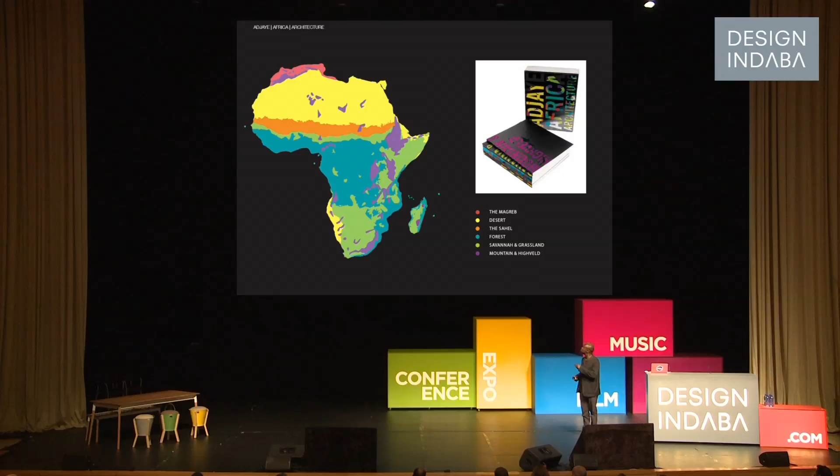Even though you may be francophone or anglophone, there are incredible connections coming through geography and place which are binding you, and you might not know it. That's been extraordinary during this 11-year journey, to see those connections.

And that's a profound thing that's kind of affecting the way we're working all the time now. So this book just came out last year, and we're really proud of it. And now we're doing other studies right now, looking at different parts of the world and trying to understand the way in which the built environment has been made and how it affects people.

Second section is really to talk about the evolving topologies in the world. Disaster and places of delicate ecosystems is something that's becoming more present in our world, and I think architects have to be absolutely engaged in it.

Asempa is a Ghanaian word which means a good story. It's really about how to make a response to a disaster, which I think was probably the first big urban disaster we've seen in our century, which woke us all up to how fragile our cities are.

And that is New Orleans and Katrina. I think Katrina was that media event which really blew up in our minds that, wow, we are in a fragile ecology. And I think architecture has to respond to that.

There's a fantastic charity called Make It Right, which asks ten architects to come in and work on creating new topologies for these communities. Where the flood happened was, of course, the poorest part of the city, because New Orleans is built below sea level, but the highest point is obviously the downtown, which was not affected. The lowest part, the residential areas, are where the floods occurred.

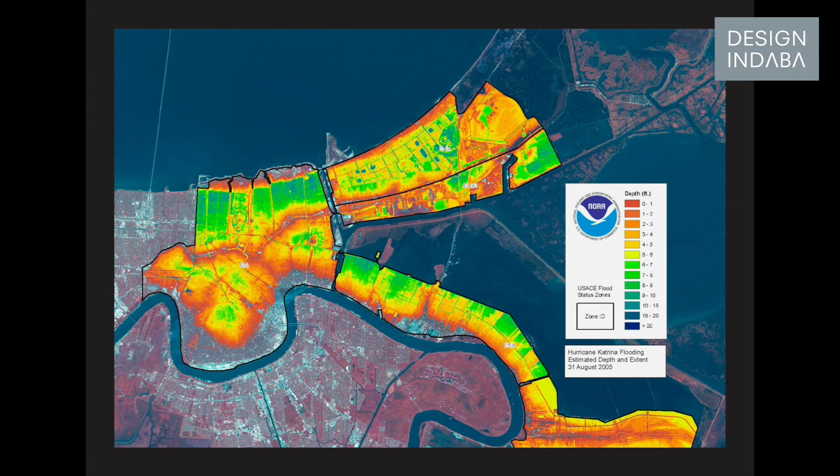New Orleans is famous for its Mardi Gras and incredible festivals. It's an incredible multicultural melting pot. But the breach happened in the most devastating part—the most delicate part between the sea and the Mississippi coming in. And you can imagine these incredible ecosystems suddenly becoming places of extraordinary trauma.

So in a very quick second, our cities and our organizations can be completely destroyed and devastated. And I think if we allow mechanization to just build the environments we're in, and we feel that as architects and designers we abdicate that responsibility, we create potentials like this. This shows why architecture, or design rather, is required ever more—with mechanizations—to make more responsive scenarios to climate.

These are the shotgun houses of New Orleans. These are some of the more responsive houses, commercial architectures that were there. This was something we looked at. We were asked to come in and really rebuild.

Make a model of sort of cheap housing—the cheapest house a house builder could make was the budget we had to use. But we had to flip that, to make it respond and do more than just be the sum of an enclosure for a family. So we questioned everything: foundations, roof, the way you made panelization. We analyzed the typical house, which was a slave house, and said, why not invert and change everything about this to something new.

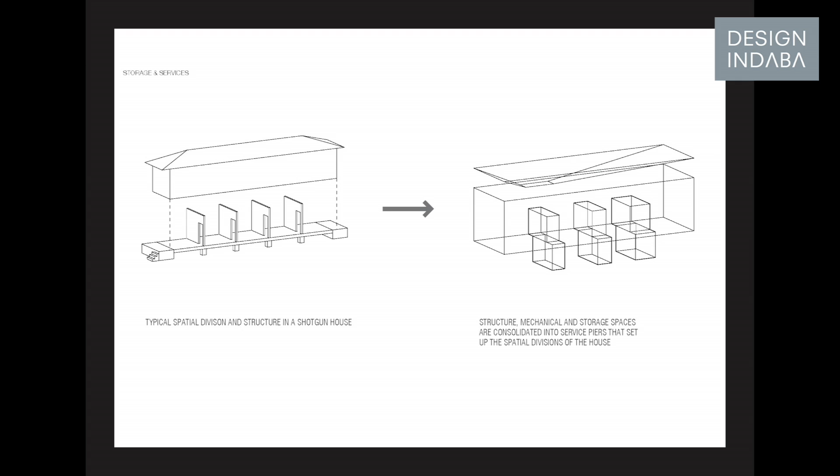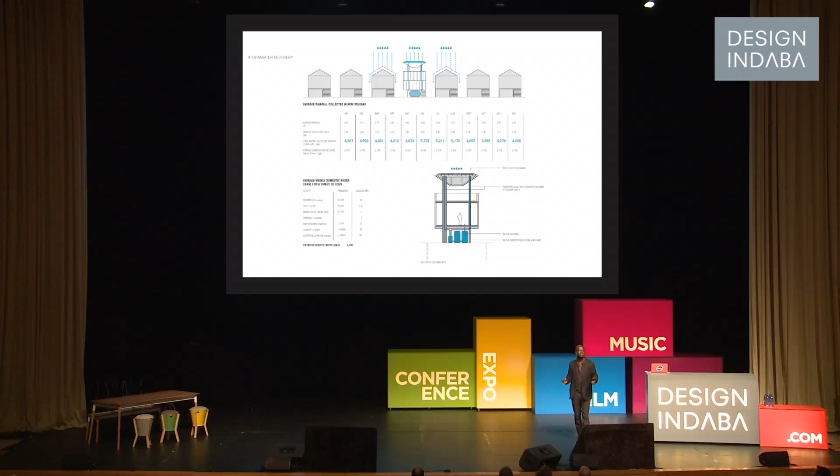We said, if this is what housing does—if roofs traditionally collect water, our traditional perception is you need a roof to collect a drain to then go into the stormwater runoff. But actually stormwater runoffs fail because we have too much urbanization, and so they kind of blow back. So actually what we need to do is collect water so we can use it as grey water.

So we said all the roofs have to be inverted—collect them, flip them up, and use them as cups that collect the rain, and use it to also collect energy from the sun. But also in doing that, you create a new topology. You move the topology from a pyramid to an inverted pyramid—a collector of energy rather than one trying to protect itself from the world. So this became a motif that we thought was powerful and could become something new.

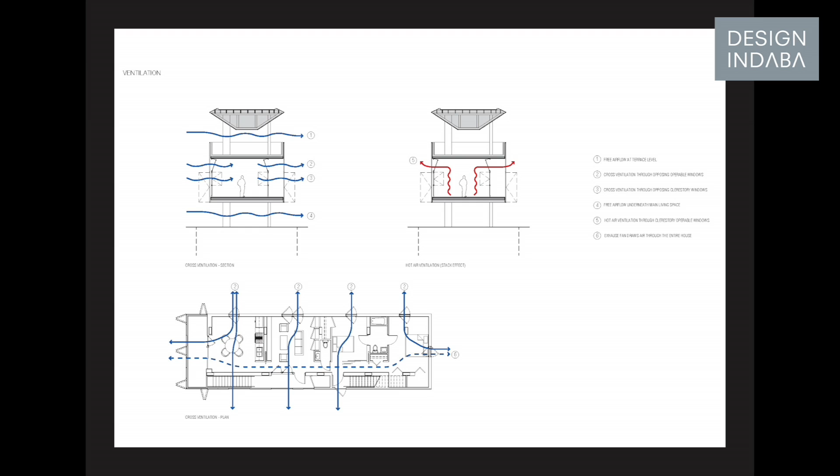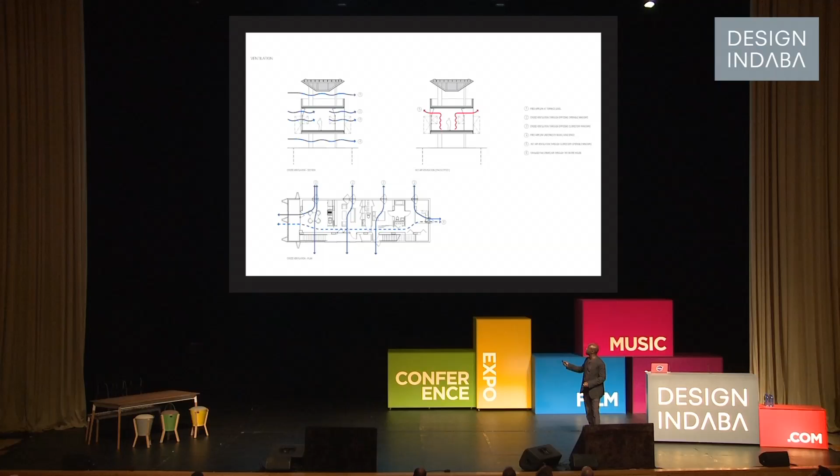We talked about all the floodplain issues, making houses that would allow themselves to be above the 500-year flood as a basic minimum. And also to say that in New Orleans, which at the ground plane is extremely hot, but at the upper level—where you see the balconies of the rich houses—it's extremely cool because suddenly you get the currents. Why can't everybody have that sort of luxury? So move away from an architecture of being on the ground and hot, and move to an architecture of being in the air.

This is the rebuilding of our sites. The 10 architects are all in here. It's a bit dark, but this is one of my houses. There are about 20 of these houses built. It's a system which was given to the community for free, and we offered our services for free for this project. Basically, there are patterns, almost like house building patterns. If your house was destroyed in the 9th ward, you can go to the ward, choose a pattern, and work through their mortgage system to then get your house remade into one of these designs.

This has been going for quite a few years, and we've been developing the evolution of it, and it's just amazing to see how people have been using these spaces.

This space not only works, we talked to FEMA, and what they started to say was really powerful for them was that one of the biggest problems about a flood is actually not so much escaping the water, but having somewhere to stay for maybe one, two, three weeks whilst the rescue team comes to find you, if you're in the middle of nowhere. So the idea of having a space that could be absolutely inhabited and safe is paramount, not just a place that you could help, but the family could go up there and wait, and the structure was robust enough.

This is just the latest one that was recently built that we're really proud of. This sort of evolution of the color, the form, the construction techniques are happening. This is the traditional house here, and this is the new type. We had images recently of a wedding that was celebrated in here, and we were really, really excited by that. This is that building that's just been completed.

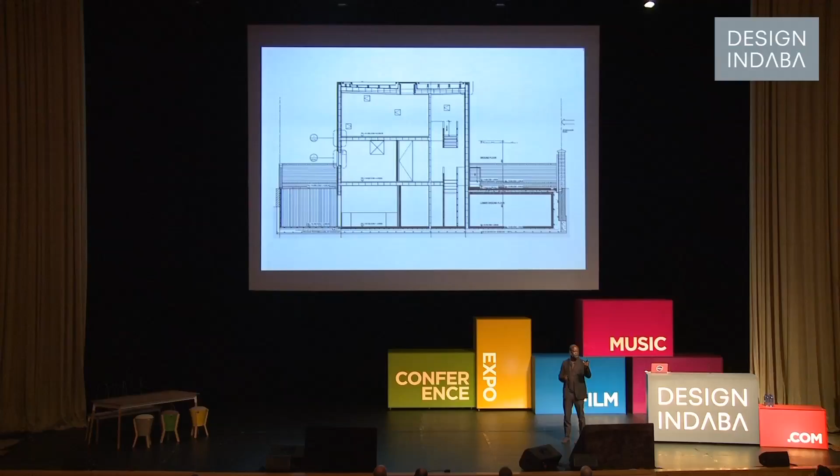I show you this because it's really critical that it was basically about making an excavation, this is the street level, putting in a concrete slab and dropping this from a factory in 4 days onto the site. Then the cladding and dressing took the rest of the time to do. But the construction technique, as you see in this graphic, is really all the same. It's this timber, solid compressed section, engineered into different sizes. The acoustics, the kind of construction, and the whole way in which you make it takes away from that hollowness of dry lining. It was the idea of trying to make something which had the integrity of its form built into the nature of the way in which it's fabricated.

But also, for me, it has to then become something that's emotional, becomes a place that can be human, and express the kind of humanity that we want in the manufacturing.

This is the house, so you can imagine when it first came up, there was a lot of controversy in the neighborhood. There were some very upset people who thought we devalued their neighborhood. And now this house has got a lot of attention and is the pride of the community. But it was a very unusual creature that arrived.

It has a kind of roof terrace. There's a bed, basically, an open bed for the summer, which is this little secret for the couple to escape from their kids and from everybody else if they want, and hide in the roof.

It's super simple. There's one window in the facade, and it frames a very important sort of church, which is this beautiful Gothic piece. And it's all about the staircase, which is made out of veneered plywood, walnut veneered plywood, which runs in a vertical triple-height space through the chamber.

And then you realize that the living room is basically in the trees. So we made one piece of glass that frames the trees, and so your aspect—because the site is incredibly narrow, all the other houses have gardens, you don't, it's just in a plot—but it takes advantage of that London rear view.

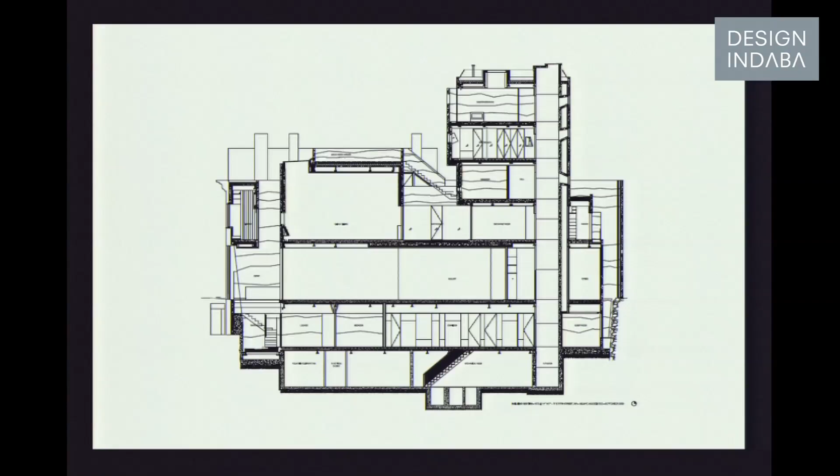This project, where you have suddenly a client who wants a house—essentially the house is developed for art, it has an extensive art collection in it. But what we tried to do is say, how can we make a house in an urban context like New York with its incredible history and layering?

So we said, why don't we take the clues of the planning and zoning of New York as a way to drive the relationship and the kind of form? So this is the existing facade of the building. We clipped a little form, a really extreme form next to it. We made a light well.

And then we made another form, the second tower, which contains the living room and the main principal space that you come in—it's basically a gallery, you walk straight into a gallery for hanging art. And then we made a third form, this vertical shaft, which steps up as you go up.

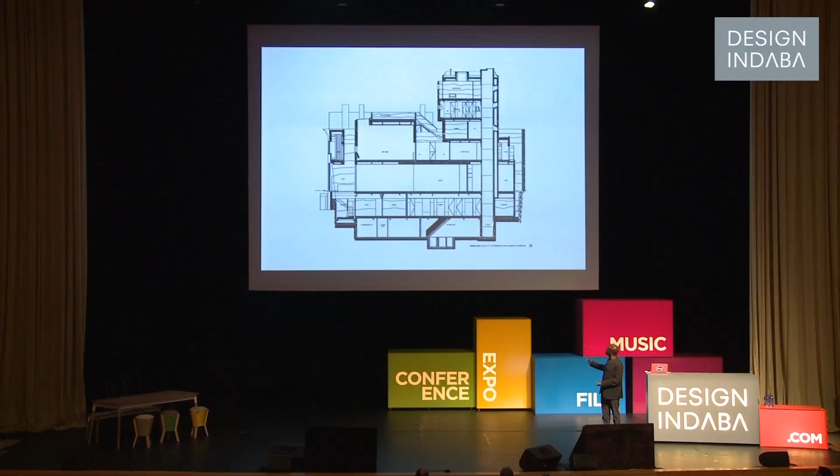And then a fourth chamber here, which reveals all the foundations, because we dug down three stories below, and we went up five stories. So it's a kind of vertical shaft that cuts through New York and allows you to see the way in which the city is made.

And you realize that actually the terra firma of New York is not really the terra firma. It's actually a couple of layers below, and people think they're walking on the ground, but actually they're not—it's an artifice. The ground plane is actually somewhere two, three stories below. And when you cut through that, you see what New York was made up of.

It was schist stone, this extraordinary granite which made the city, timber compression forms, and the foundations are all still under the city. The city is a piece of archaeology, and the architecture in a way presents a way of looking at the city vertically and horizontally as a kind of new type in the city.

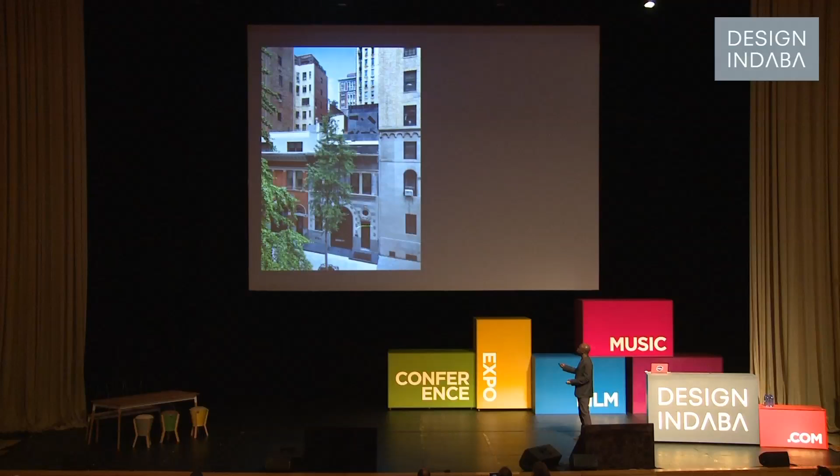So here it is. It's made out of black cast concrete. This is its initial form. It slips out and then presents a new sort of entrance. This is the gallery that you come into. You can drive a truck straight into the front. It's probably the only Park Avenue house that you can drive a truck straight into, only because the things you've got in there are very wealthy, and you want to make sure you're not schlepping them on the street.

So we developed a bridge with an incredible museum-scale door to get you in there. The residence comes straight up, and you see the first light well, which articulates the two towers. This is the third light well, where you suddenly see the original foundations of the city, and we framed it. The beams collapse around it to brace it, so you see it and you reveal it.

And the concrete, we spent an exorbitant amount of money teaching New York contractors to do bad concrete. I was like, let's make dry, handmade concrete. I want to see the life in it, and I wanted concrete to behave like geology. I wanted it to look like what it is. It's earth, it's material out of the ground, not a sort of artificial artifice.

So my interest in concrete is the way in which it performs, displaying weight, materiality, texture, imperfection, and the whole house is sump poured, so you have these extraordinary creases and lines. It looks like the skin of an elephant.

Living space. So you're looking through three layers: the outside, the thin chamber, the first light well, this second one, and the one that I showed you before is behind you. This is that thin chamber, which is a library, and sort of looks through. And this is looking the entire way through light well one, light well two, light well three, and the outside. And then this is that central one, which talks about the urbanism.

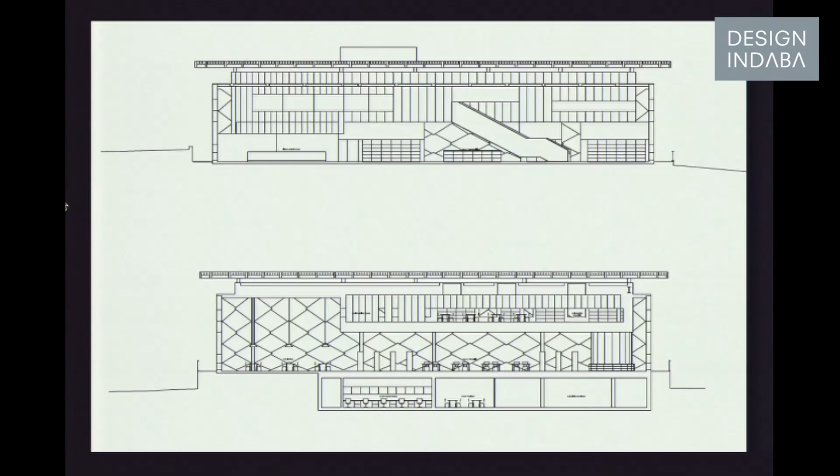The project acts as a pavilion, a gateway sort of between that housing and the park. In section it looks kind of straightforward, I guess. It's basically a series of buildings within buildings which keep changing scale and work through a series of things.

The outer skin is a box which is only 40% glazed, but looks like it's glass. It's not. Then there's a kind of inner box which has relationships to the sky and to the views, and a varying set of systems that take you up through it.

The skin is parametrically tuned so that it actually has a movement in it. It compresses and opens to do with perspective. It's really talking about the nature in which you can bespoke industrialization now - the ability to tune elements in the old rational standardizing sort of production of things to what you need.

The parametric tool can allow you to basically start to make incredible geometries, incredible shapes, but using the efficiency of computers to allow you to not make waste so that you don't bring up the cost. So these are standard units, but they're cut through an efficiency diagram, and if you notice, the geometry expands up and down and moves across the space.

This is the library. It's south-facing again, and it has this very large canopy, which projects over the entrance space and deals with the solar gain.

This is the skin of the building. You see that the diamonds become more vertical and compressed as you turn around the corner.

Forest and the suburbs. As you come close, you start to see the form, and you start to realize that these are actually just mirrors - every other one is a mirror. And when you get really close, you start to see that it's mirror, view, and these are highly insulated volumes, and that's how we get now 60% insulation in the skin.

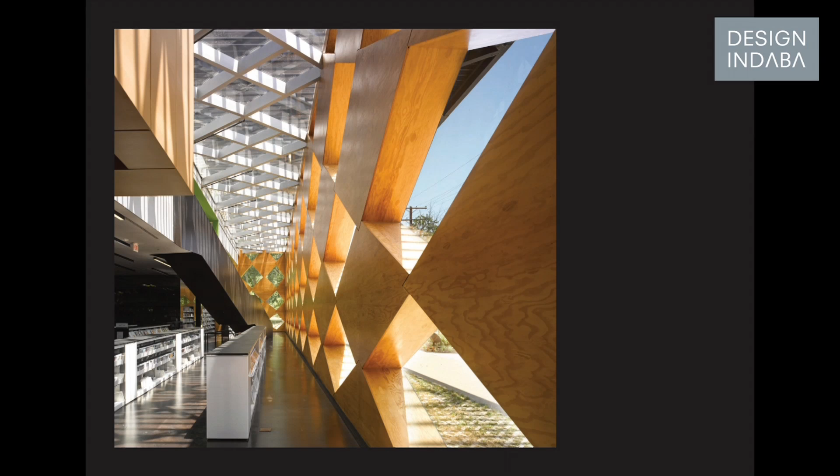And then when you go inside, you realize it's a wooden folly in the park. It's basically a giant lattice of plywood - essentially Douglas fir plywood, which has just been beautifully joined together, and it's basically holding the glazing, making spaces, making that depth, which is the contradiction of the exterior, and becomes the space for the enclosure.

This is looking back to the forest, through the computer rooms, teaching suites, special acoustic suites. And it's amazing, we see kids in here sitting with their computers, using these as kind of loungers, which is not designed, but really exciting.

We brought in Senegalese weavers to make the lampshades. That was kind of incredible because the US doesn't like importing things that are not tested from Africa. So that was a really tough one, you can imagine. But we managed to get these lampshades through, which I'm really proud of.

You can see those moment junctions. So this bending and really wanting to enjoy the bend and this idea of this wooded forest, almost playful-like, is articulated, and this is the way in which light and space and structure come together.

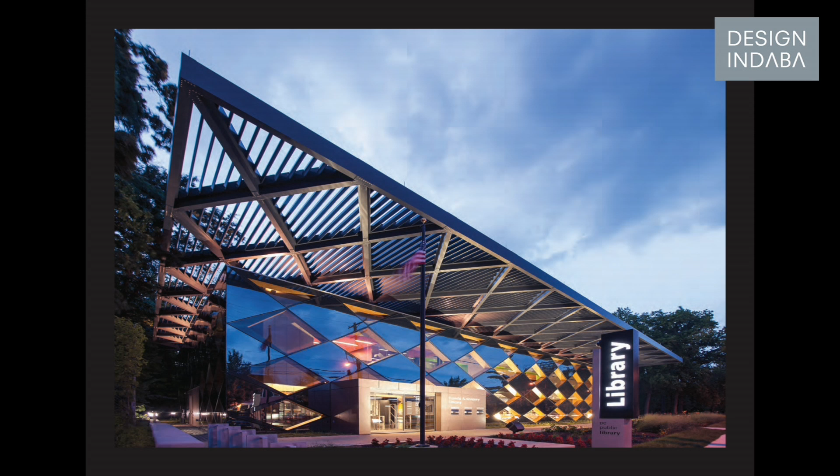Moscow is probably the biggest project we've done to date, a very challenging project, and a very different climate for me. I've sort of used to Europe and Africa before this, but moving north has been interesting. So what we were asked to do - it was an international competition, and we were very lucky to win it - is to build a management school.

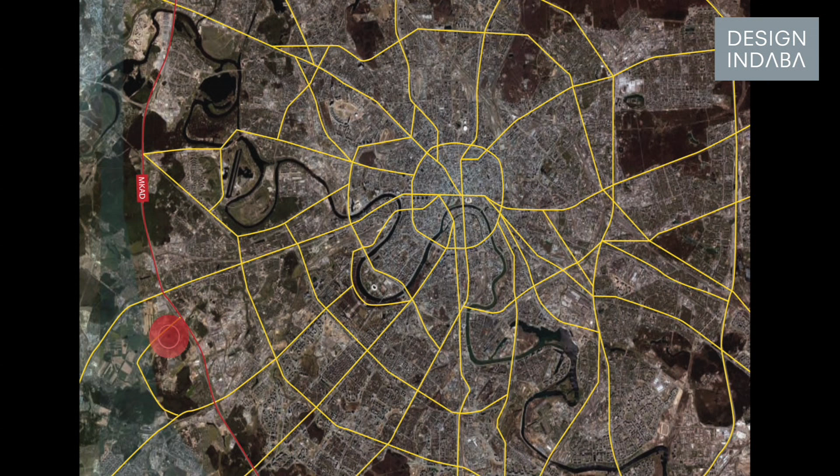It doesn't have a Harvard Business School or an INSEAD. When I won this competition, I was blown away by the heritage of Russia, but it's such a shame that very little of it is actually real.

It's the beginning of our idea of what industrialization does, to our sense of what modernism is. It comes from Russia, from the futurists, from the constructivists, etc. But very little of it's left, except for things like Melnikov's extraordinary house, which is basically a tiny little studio.

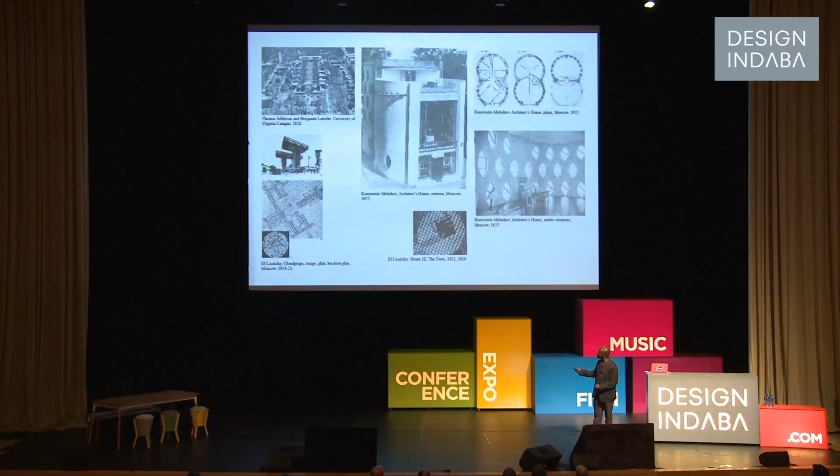But something that's really powerful is Tatlin and El Lissitzky's drawings. Look at this - this, for me, was the challenge. As a student in the 80s, I said I want to build this one day. I think this is the project that started to do that for me.

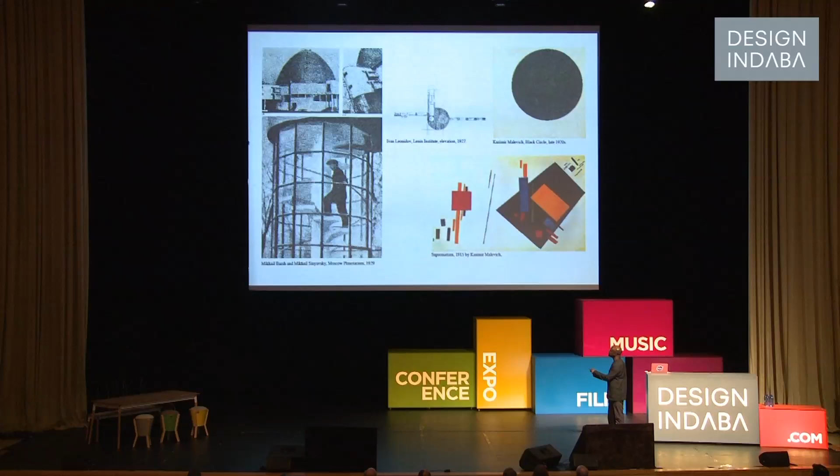The site was extraordinary. If Tatlin, for me, is the body of modernism with these forms, Malevich is the soul of emptiness, with his incredible studies of nothing and pure geometry, making composition that has some kind of meaning. I thought that between these two poles is a kind of idea of modernity, and what can we do with this.

It's ironic to me that these things exist on our continent, and some things that I love and look at - shrine structures in the Yoruba, weaving structures - and their incredible ability to make abstraction and form. I said there's actually connections between all these things, and I wanted to explore those.

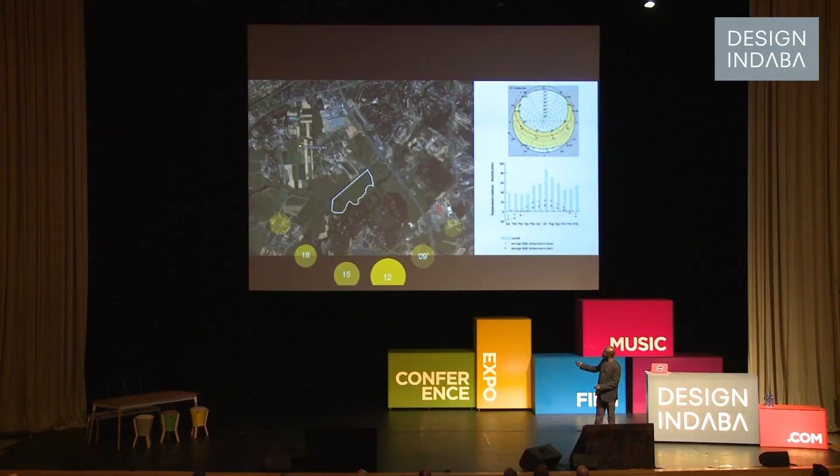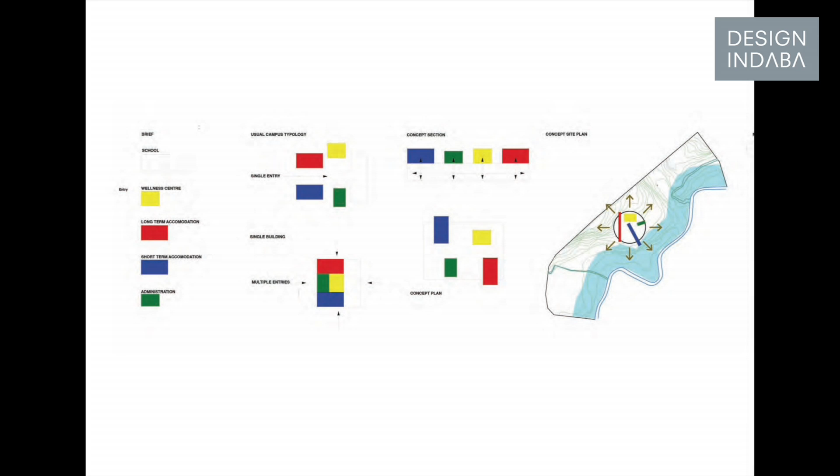So we said, you can't make a campus, you can't make a quad, you can't make all those monastery types, but you can make something that's similar to - it has to be a kind of new kind of building - which is similar actually to the churches that were made in Russia, the old churches, which are basically giant wooden boxes. But they had on top of them also this kind of idea of an architectural city, an ideal city. I also thought that was really powerful.

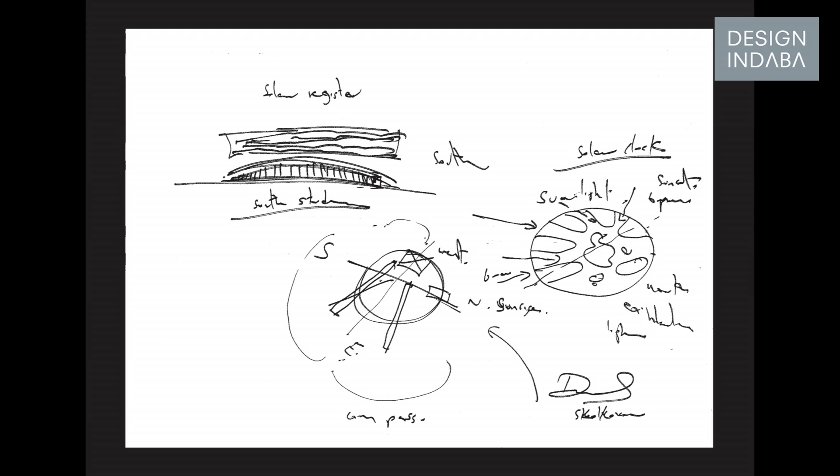I said, basically, let's make a hyper building, a giant, large-scale building, which is 300 feet deep, which organizes the entire school and is a kind of world. And above it, let's have a series of bars which have the education, a hotel - because the school is cross-subsidized by a conference center, which becomes the kind of premier conference center, which pays for a lot of the overheads - and a sort of body building, which is gym, swimming pool, etc.

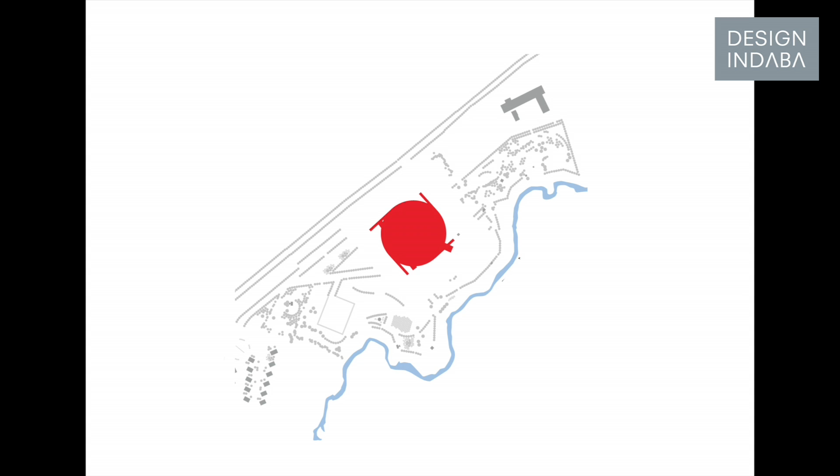But I said, let's make it, because it's the first building on the site, like a solar clock. So it's basically about the orientation and the location. This is the building in its landscape - you can see this massive form, a kind of new giant form in its landscape. It's a kind of reverse. So this is this form, which is the clock.

So each unit has to have a break. This is north, this is the southern aspect here. Basically the classrooms are between those, so that you always have school, view, daylight, school, view, daylight. But also the light breaks through, so you see the light through the day - it comes through in slices.

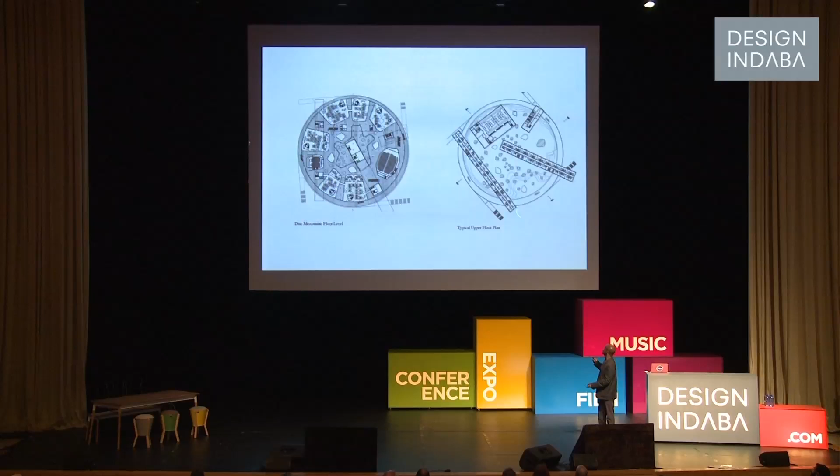It was kind of a new experience for us. You always go round and round, and you're always kind of observing the views. And this is kind of what a super scale building can sometimes allow, which is something completely new and unexplored in architecture. We have sort of urban architecture, which is large, but not single forms in the landscape of this kind of scale.

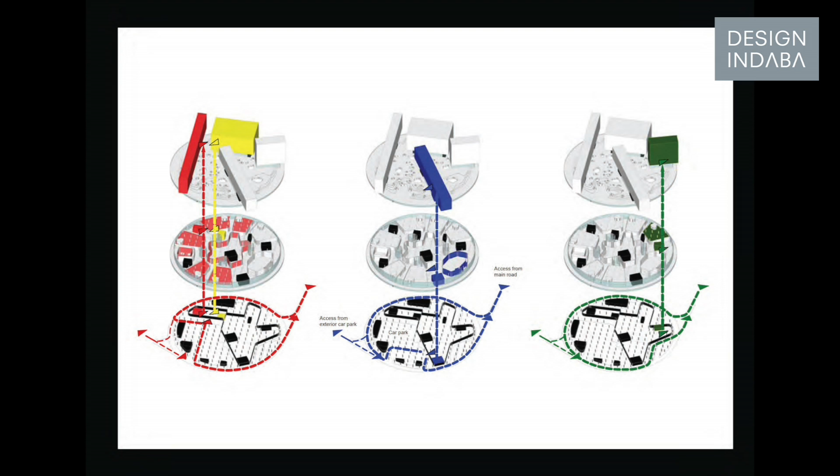This is just showing you the programmatic way in which the school, which is red, uses it; blue, which is the conference center; and the green, which is the back of house, administration, libraries, etc. This is the building in its context.

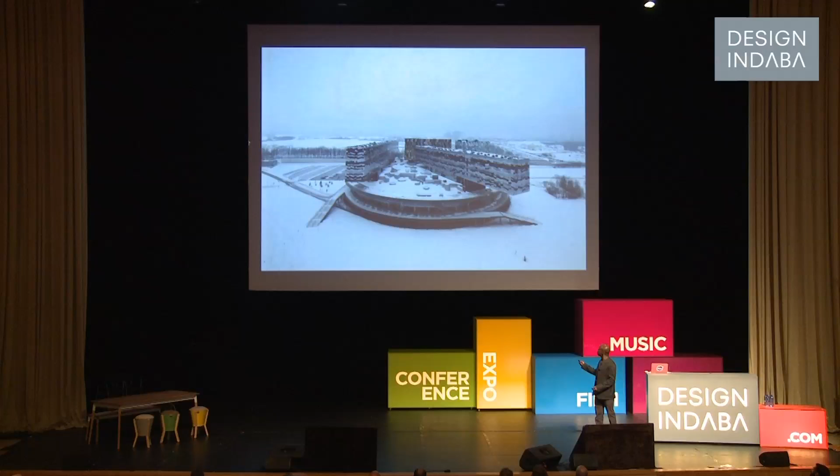It's a drawing of light as well, using parametric geometry—basically concrete and glass. All of this is cast, weight-bound concrete, with a 2-meter deep foundation that creates the cantilevers. These are 125-foot cantilevers, all tiled in glass, with 4 different colors of glass throughout. It's done using parametric tools, so it's as efficient as making a standard glass wall, but it's a very different thing.

This is the west, you'll see it. This is the south—this is Malevich's burial. I love this photo, it's for me. This is in the spring. This is how normal pictures are.

So you see the east, and then you see the way in which the stairs, which are the forms, bring you from the main space down into the public areas. You park underneath when it's snowing, through the lobbies, and then up into the main spaces. We didn't do the main spaces, we just organized the form, but we coordinated the key materials like white marble, louvers, dark timber ceilings, etc.

Then the giant skylights, and the auditorium, which we did. There are these large skylights in this 300-meter form, because you wonder how you get light in. Apart from the windows, we made what I call clouds—these little floating forms, which are basically the way in which you bring light down into the space, seeming to meander across it.

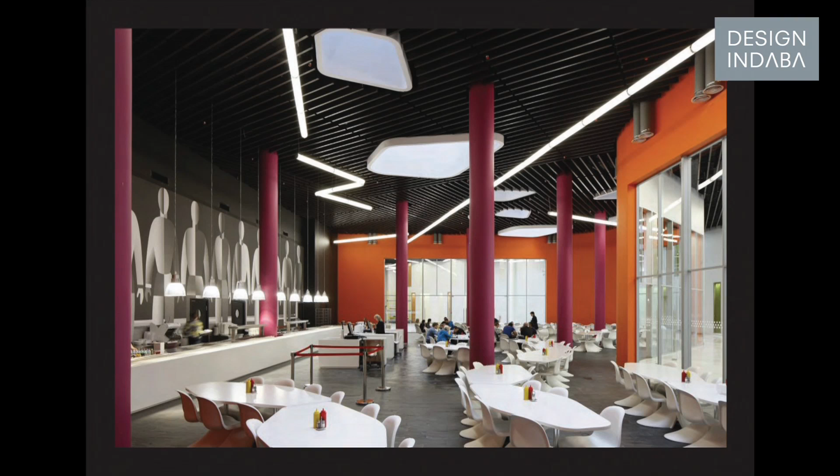And then there's moments between the different schools, classrooms, and then the west. It's the only building that's gold, so at sunset, the western sun hits it and refracts all over these buildings. We put in an Olympic pool, which the Russian swimming troupe uses, so you can see them sometimes, which is kind of fabulous.

The gymnasium, and then up on the roof. It's the south, so this is the register—these are the student blocks. It's the main form, and you see it's held on these 2 columns, cantilevering over and out.

The director's room—he furnished it, not us, but he's so proud of it. He sent me this image, and I always use it in my lectures, because he was so proud that he found an angled chair to match his windows.

This is the Smithsonian in Washington. This brings us back to Washington. I don't know if you know about the Smithsonian—it's probably the largest cultural institution in the world. They have 23 museums, 12 of them on the Mall. We're building, I think, the 24th.

This is I.M. Pei's masterpiece called the East Wing. This is Gordon Bunshaft's amazing structure. This is the original first Smithsonian, and it houses all the cultural depository of America. We're building the last museum on the Mall, which is supposed to finish a plan made by an incredible master planner called L'Enfant, who designed Washington and talked about the essential components of culture being completed on the Mall to represent the idea of this new land, America. So we're completing that master plan after 200 years.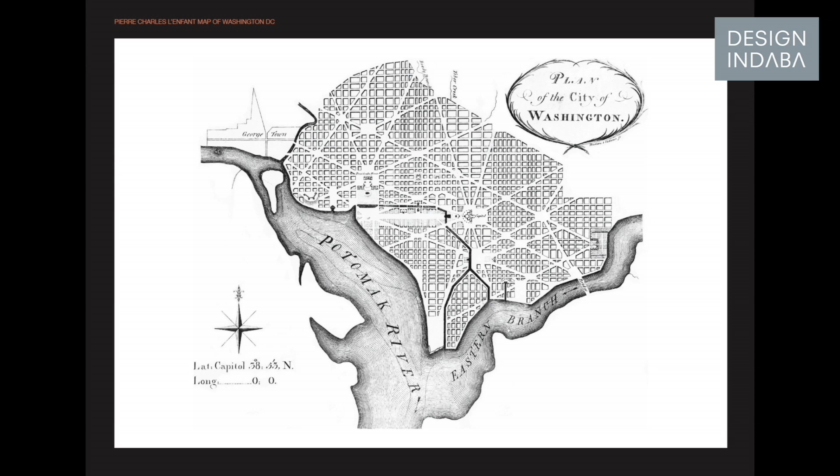And they made Charleston, New Orleans, etc., right up to Washington. This is L'Enfant's plan. L'Enfant had visited Europe and basically made a kind of version of Germany, France, and Italy.

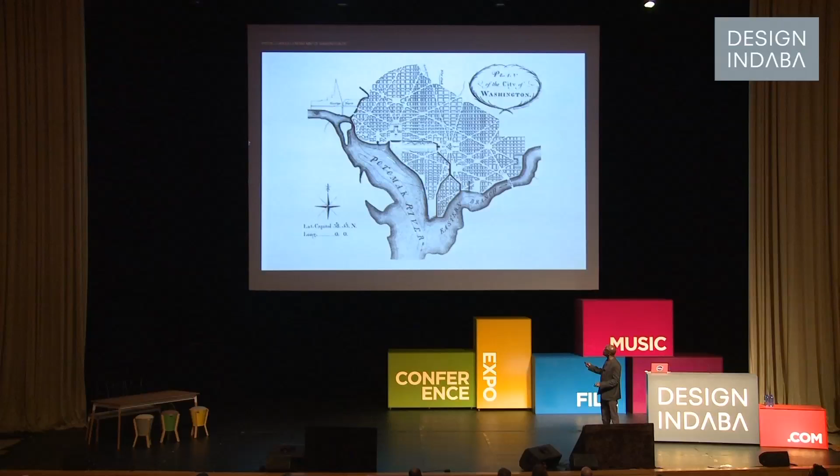This is the Capitol. This is the Mall. This is the Potomac River. This is the White House here, which deals with the axes, and then a series of principal monuments. Then the museums were planned to be here.

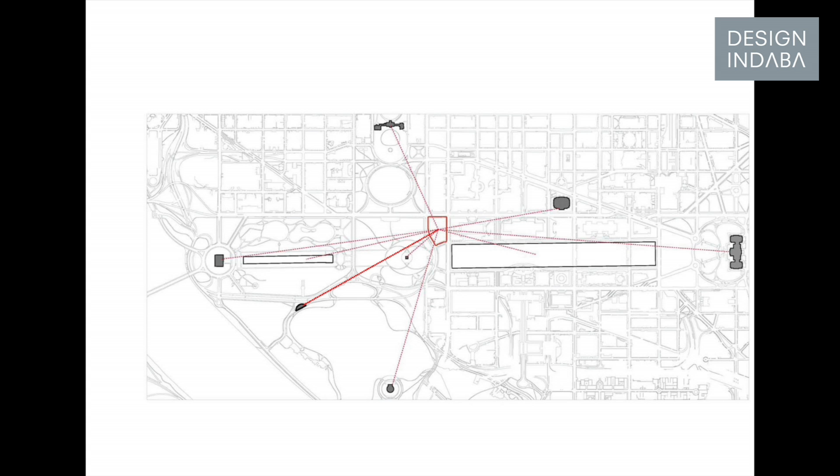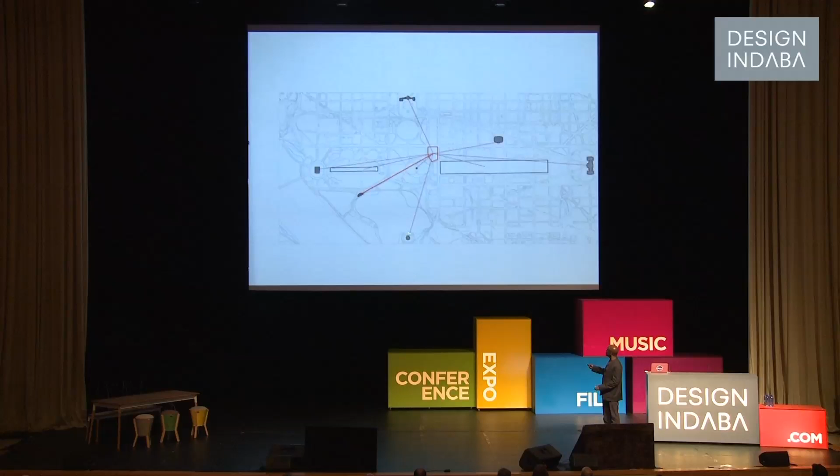The site is coordinated around these very important monuments: the Mall, the reflecting pool where Martin Luther King made his million-man speech, the I Have a Dream speech. Lincoln is here. Martin Luther King is here now. Jefferson is here. The White House is here. The National Archive is here, and that's Congress.

So it's a kind of hinge moment. And you can imagine the contestation. This is the most contested project that I've ever worked on. We spent three years getting it through the system. But we have the building. It's on site.

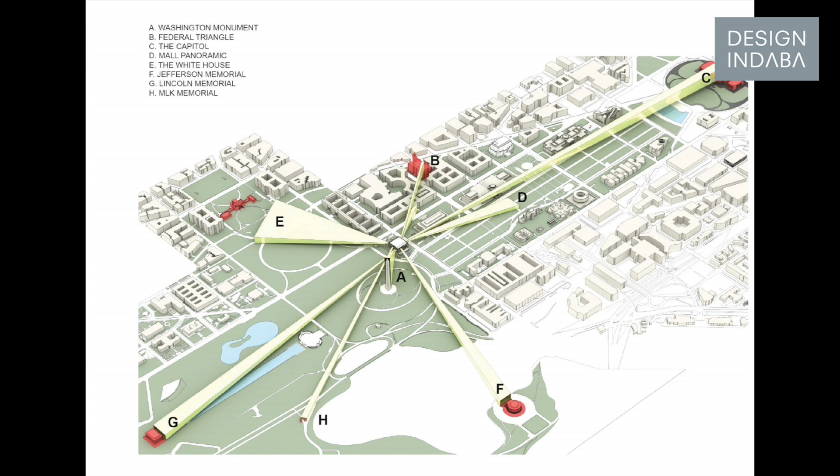We said that it had to be a pavilion of this form, and it had to acknowledge these relationships. It had to be a museum experience which, while delving you into content, also related you to the place. It had to be a building which also responded climatically, because Washington is a swamp. So this architecture of shading is really, really critical.

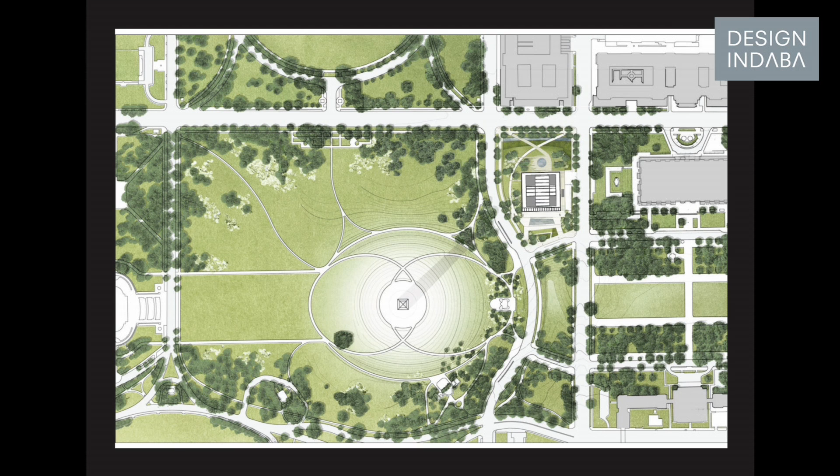So basically in the end, it's a cube which sits on a landscape, which coordinates paths all the way across the site. The site was where a slave market used to be. So the history galleries are basically buried under the sacred ground. The history is immortalized in that site, and then the major galleries are up above in the light.

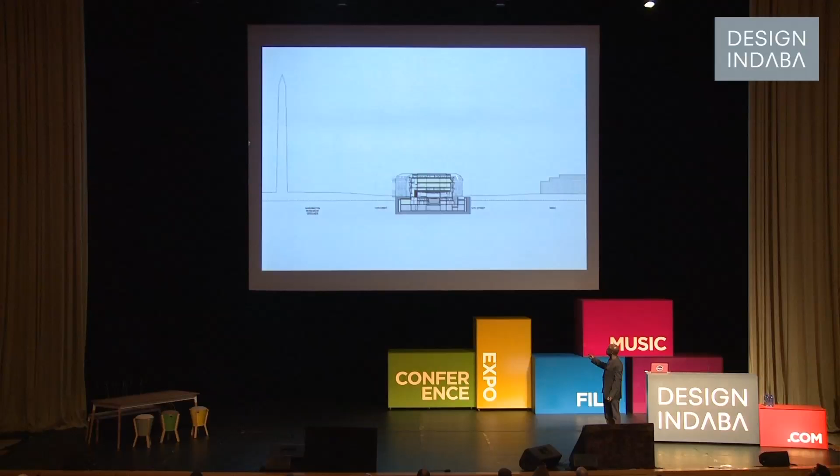The skin of the building is this corona system. It's another box within a box, but the entire ground floor, which is a 210-foot cube, is open to the four directions of light.

This is a cross-section. This is the south. History galleries are here. The section of the history gallery is the same as the section of the building, 60 feet deep. So you'll go 60 feet deep, rise into a chamber of light, and rise up 60 feet and finish.

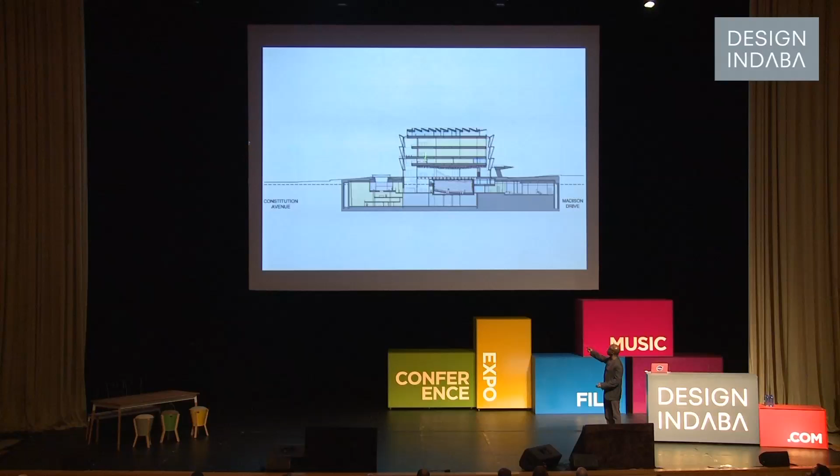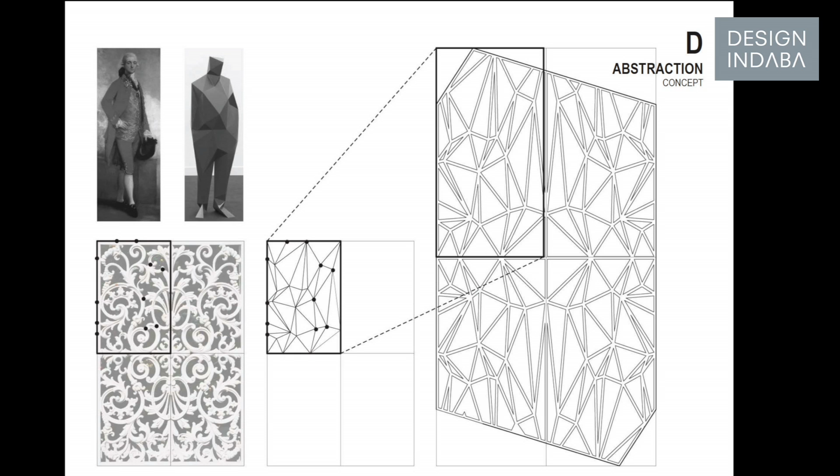We said that I wanted to honor the people who made these things, so we used parametric tools to basically make a 21st century version of this.

These are the studies we made to deal with the climate control and environmental studies. This is a one-to-one scale of the study. And it's essentially a cast aluminium, hybrid alloy cast aluminium, so it's super light, coated in liquid bronze. And it looks like this.

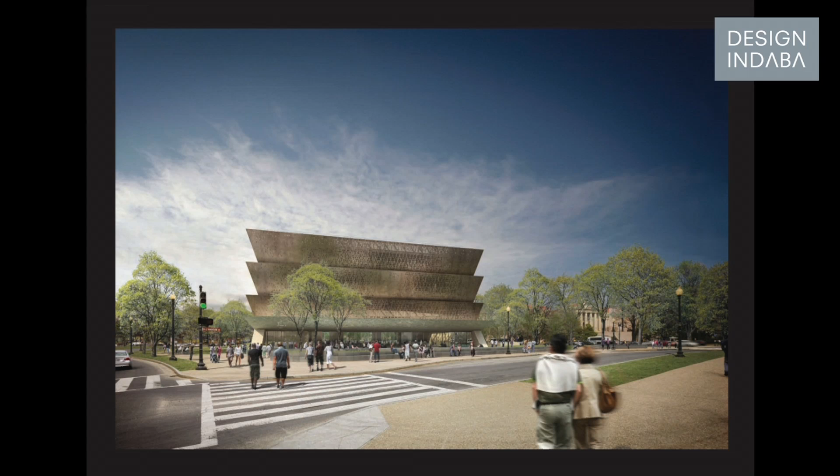So it is going to be a bronze new hybrid material, which is the solar screen, but also the main form of the building. The interior is just terrazzo stone and timber.

This is a cantilever that's 210 feet on 2 columns and a 60-foot projection tilting to create a bending, reflecting pool. We worked this out so this gives us, we think, between a 5 to 10 degree temperature difference depending on the outside.

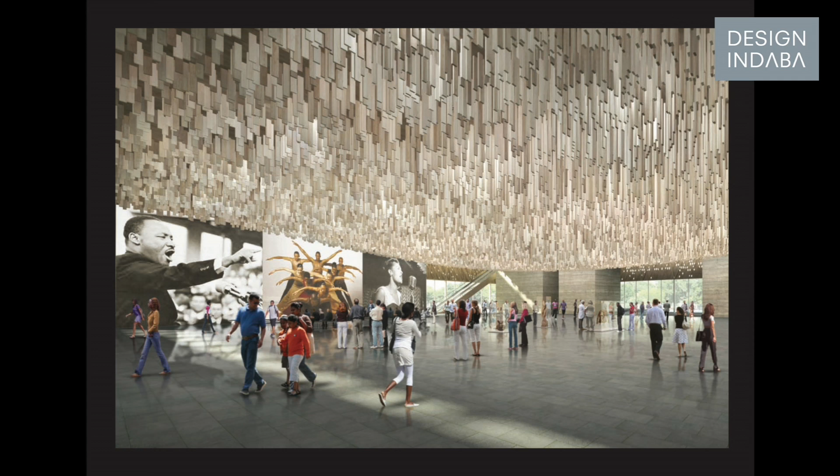Then the hall with the 4 directions of light is this free form of timber, this frozen moment. It's 500,000 pieces of timber, and it's actually the number of African Americans who were actually brought to America. Of the 11 million slaves that left Africa, only 500,000 went to America; the rest went to the Caribbean and South America. 30 million African Americans exist now.

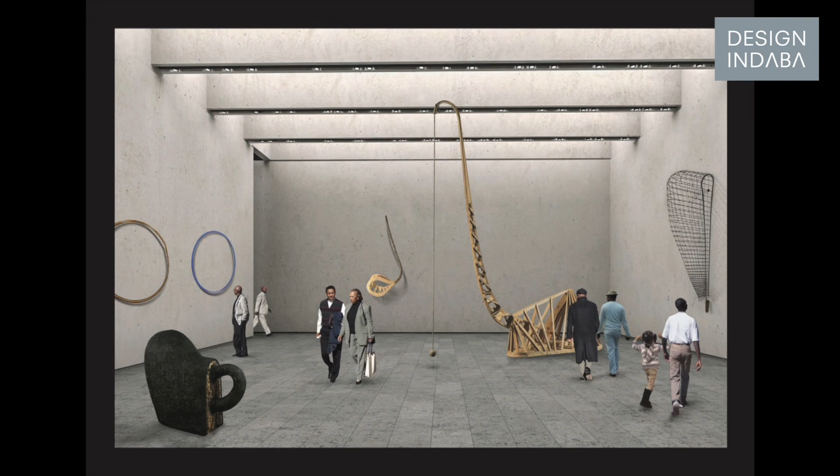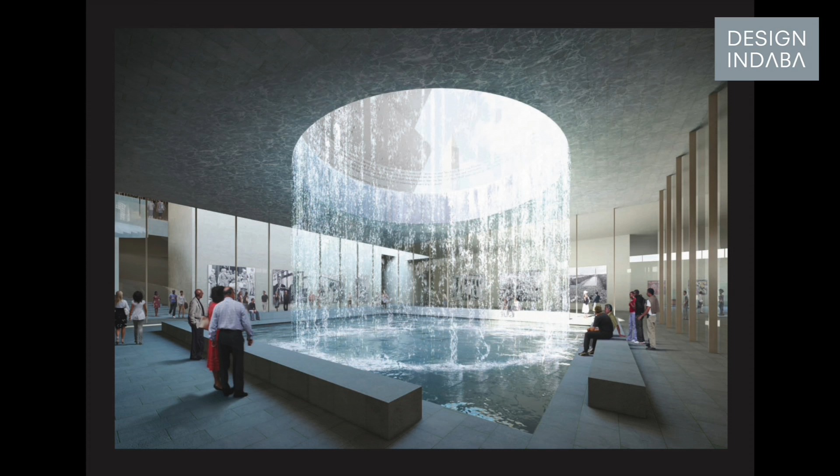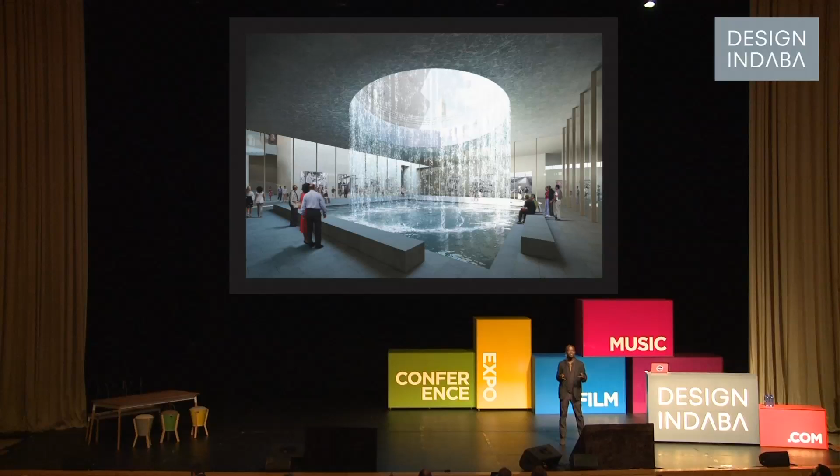It will memorialize and exhibit places, going across the entire range from history, and will culminate in this chamber, which I love very much, the end of the history galleries, where you have an oculus to the Washington Monument, the first president of America, and to the edge of the building. And it's dedicated to Martin Luther King, who said that the most beautiful thing about rainfall was that it was like justice—that justice is rainfall, the cleansing form of justice.